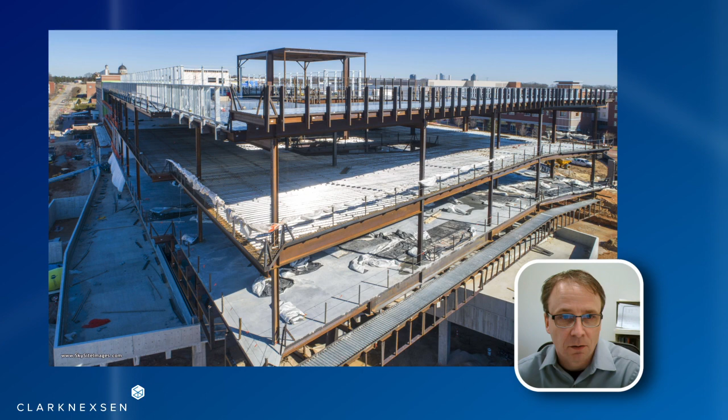You may recognize this building as Fitts-Woolard Hall at NC State. It's an architectural wonder, but it also has many visible features of engineering. And this is intentional. It's the main engineering building for the campus, so engineering students can see and experience firsthand the actual systems they're learning about.

Now, we've talked about how important structural engineering is, but what exactly is it? In summary, it is the design and arrangement of materials and members to resist loads, to make something stand up against gravity, or the wind, or an earthquake. We determine what the skeleton and framework of a building needs to be in order to stand up to these forces. We use a variety of materials and a system of components to make this happen. We'll talk about each of those in more detail today.

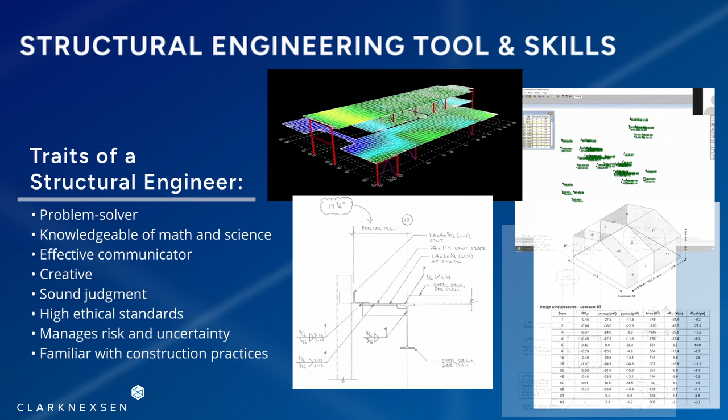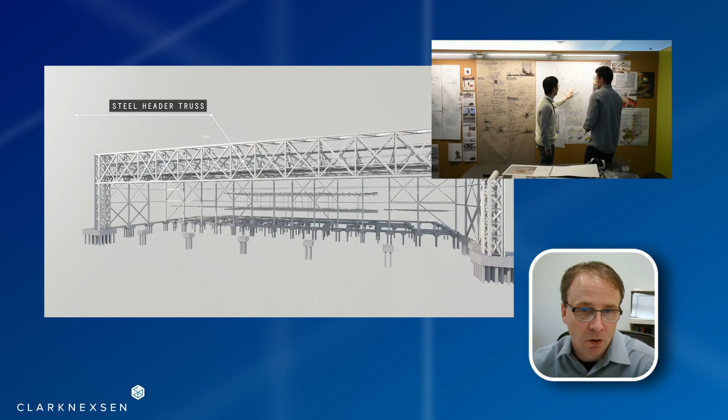As you'd expect with engineering, there's a lot of math, science, and technology involved. We do a lot of calculations, drawing diagrams, and running computer analysis. We have to determine the forces on every structural element in the project and design it to safely resist those forces. Structural engineers are just one part of the design team that makes a complex building come to life. We work closely with architects, mechanical and electrical engineers, civil engineers, plumbing and fire protection engineers, each with their own specialty and adding their own expertise to the finished product. So teamwork is a very important skill.

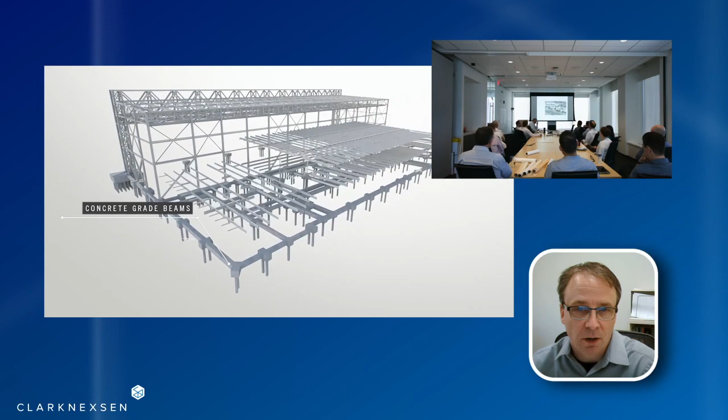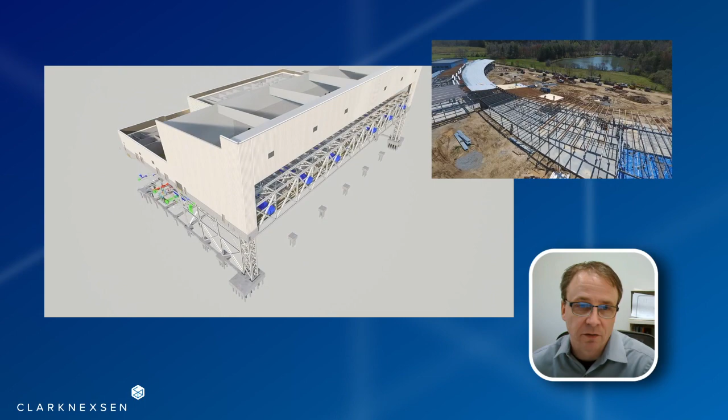We also have to be familiar with construction methods and materials to balance strength, cost, durability, and appearance to create a frame that can be constructed in the time available, with the money available, and still support the architectural vision. Structural engineering involves investigating and discovering the numerous requirements and constraints of your project, and then working with your team to get the best possible solution.

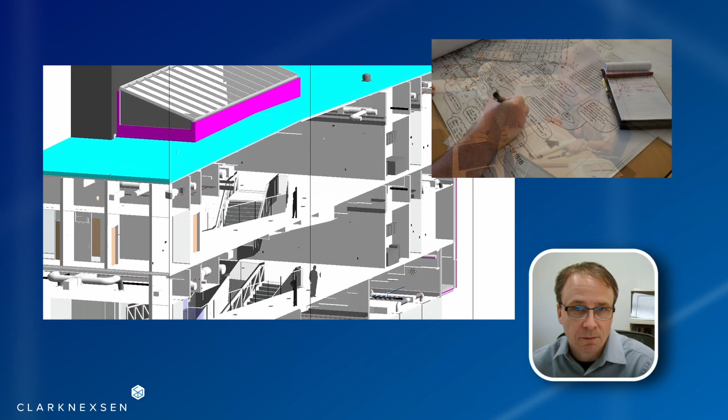Structural engineering also has a creative, artistic side to it. Each building project is new and unique, with new problems that need creative solutions. We spend time sketching and visualizing various issues, exploring options, and developing alternative solutions. And once a problem is solved, we need to translate that math and science into pictures and drawings that can be used by contractors to construct the building. It's never boring and always challenging.

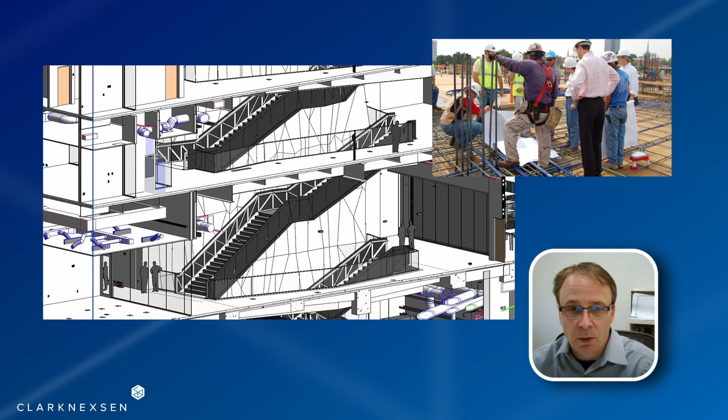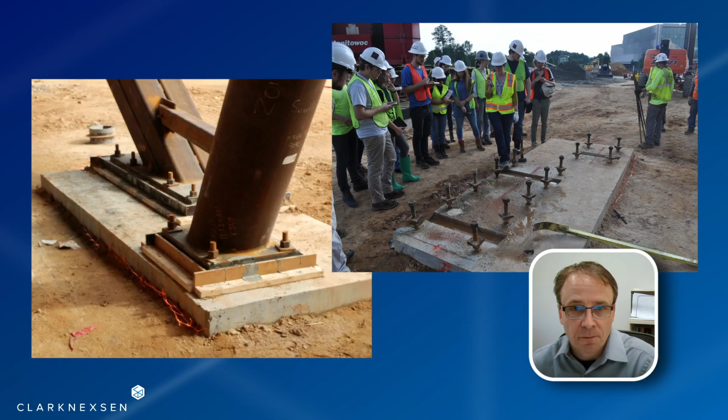One of the great things about this career is getting to see your design get built. Part of the work of a structural engineer is working with construction contractors to make sure that everything goes together correctly, that your design is properly executed. Seeing something you calculated and designed being built is really one of the most satisfying aspects of this profession.

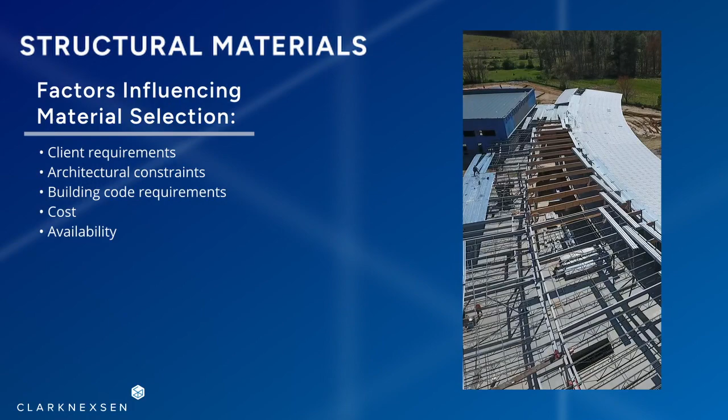Today I'm going to talk to you guys about structural materials. Structural engineers consider all kinds of materials when designing a building. Most of the time, the material choice depends on what our client wants, what the architect wants, and what is required by the applicable building code. Cost of the materials is a key factor. Our client doesn't have all the money in the world to build the structure they want, so we have to keep that in mind when choosing the material we want for our design.

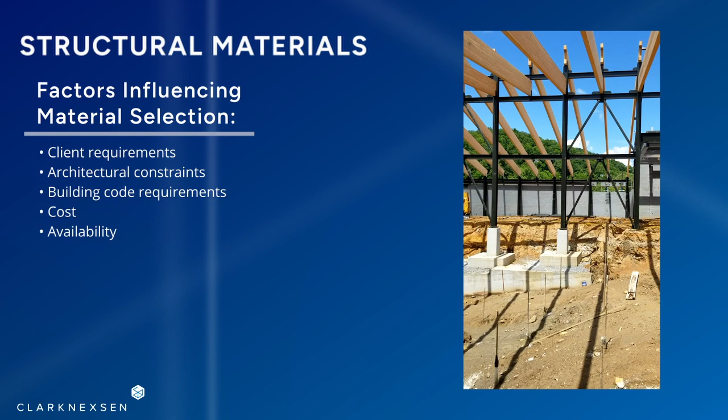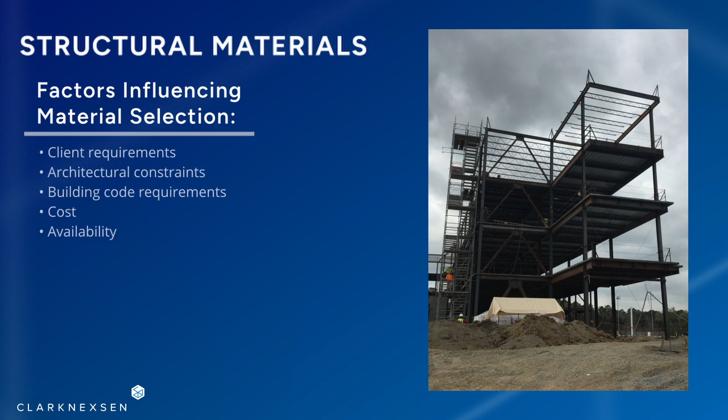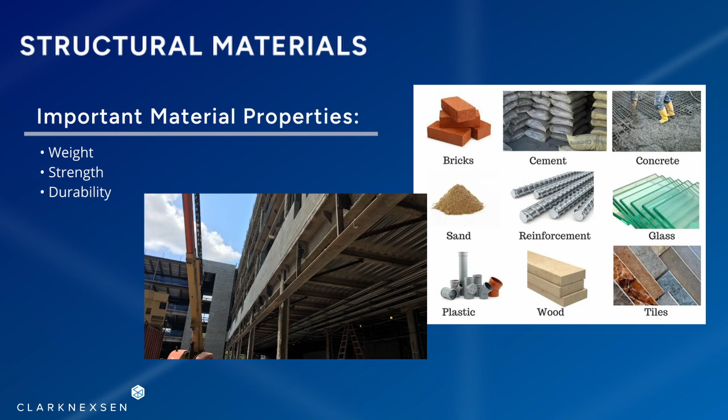Availability is important. Not all materials are available everywhere. For example, if you're in Alaska, you may not be able to get the same materials as you can in North Carolina. All materials are different and have different properties that need to be considered during design. One property is weight. We need to make sure that our building isn't too heavy because that will affect our foundation design. Another quality is strength. We want our materials to be efficient and strong enough to resist all the loads they're going to see. Durability is another quality that we design for. We want our structure to last long. We don't want it to be worn down by the environment or outside effects that impact the material.

First, we're going to talk about concrete. Concrete is a material that we use very often as structural engineers. If you just sit and think about your everyday life, you see people walking on a sidewalk, driving on roads, the driveways of your homes. Typically, it's always some type of concrete. Concrete is everywhere. It can be used for any shape or size and for any need you have.

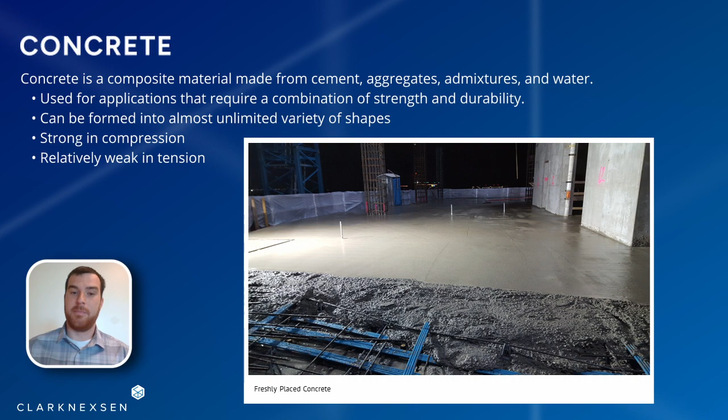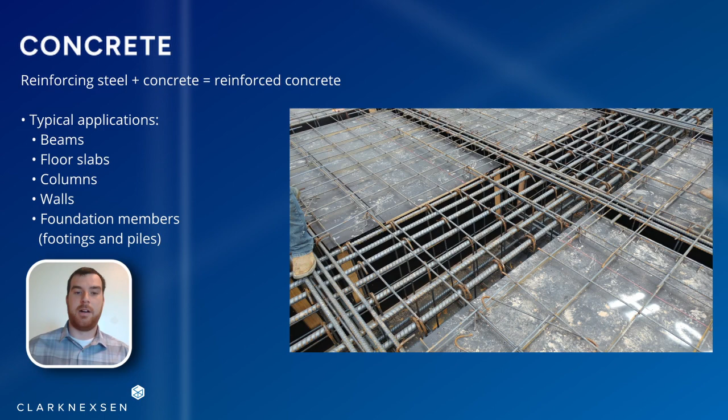Concrete itself is very strong in compression, but it's pretty weak in tension. Due to the weakness in tension of concrete, we add steel. Reinforcing steel is often called rebar, and this is what creates reinforced concrete. Reinforced concrete is also used everywhere. We use it in buildings, bridges, waterfront piers. Reinforced concrete is just a great material to use for design.

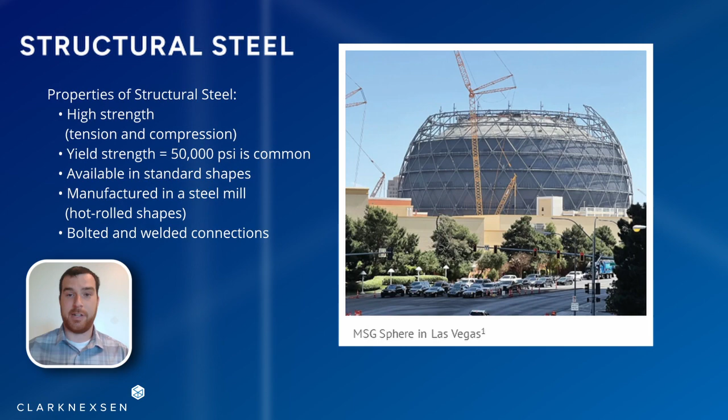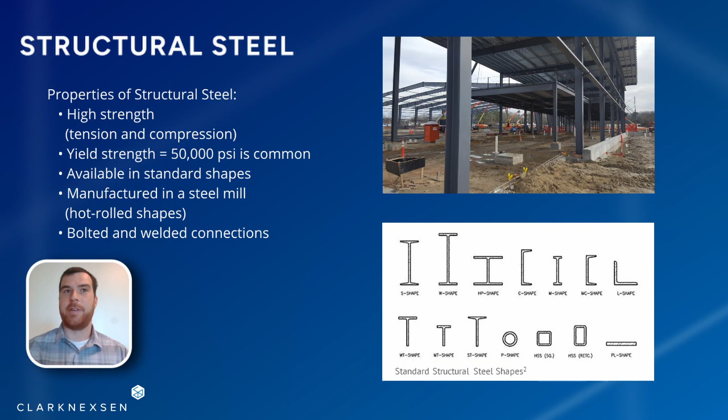Another material that we use is structural steel. Structural steel is very strong in tension, very strong in compression. It has all kinds of shapes that can be used for any need on the project. And that's why we like it so much. It's just very flexible for design purposes. We can use it to fit any need for any loading condition.

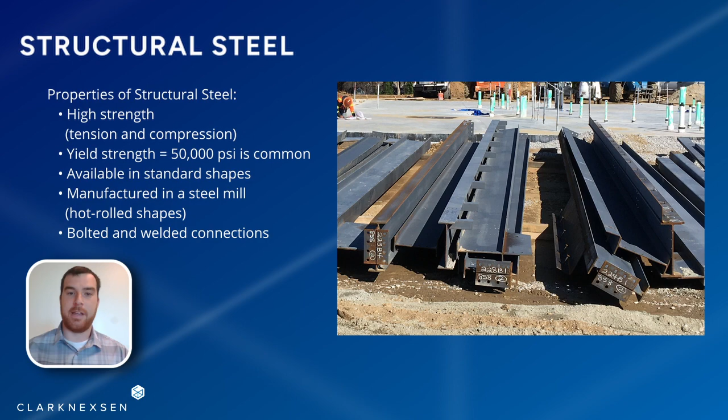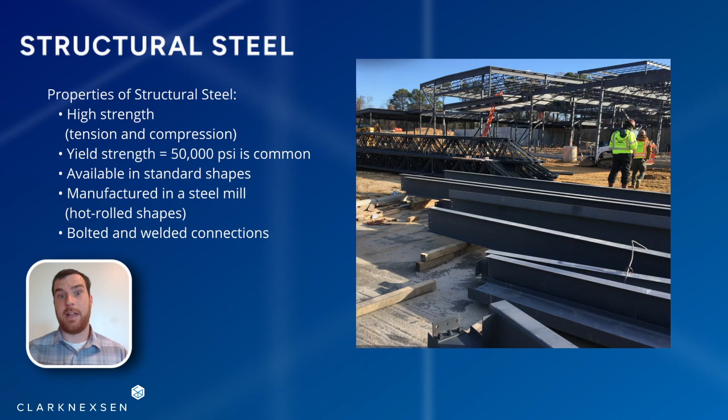Another positive of structural steel is that a lot of the connections that are made in the field can be done in the shop. You can do a lot of welding, pre-assemble everything essentially, and then when it's brought on site, it can be put together very quickly, which reduces labor costs, which reduces the cost of the project. And steel can be relatively lightweight if you compare it to concrete, and so it's pretty easy to transport and handle using cranes and whatnot.

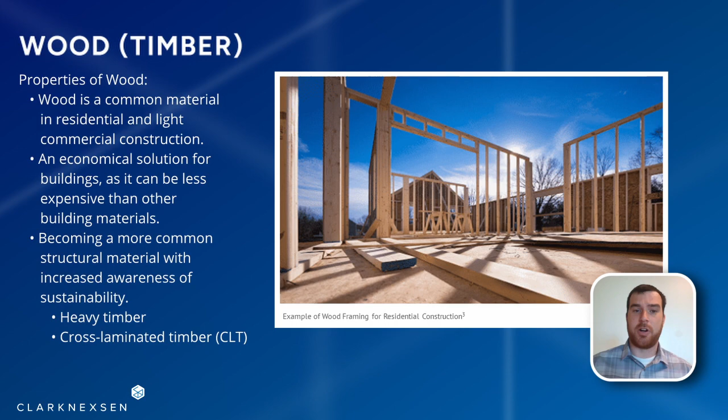Another common material that structural engineers use is wood. Wood design is typically a specialty field of structural engineering that's used in residential construction. And as a material, wood is strong in compression, but it's pretty weak in tension, if you compare it to steel. And wood is a good option for materials when you're trying to reduce the carbon footprint of a building.

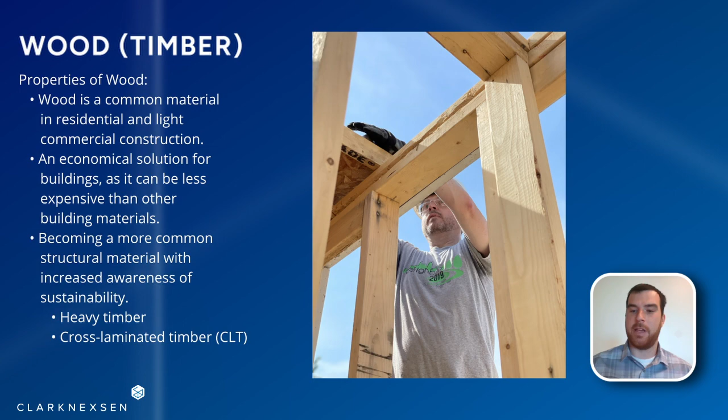We're in 2023, and there's a lot of goals as a structural engineering community to try to reduce the amount of carbon that goes into our design and building of structures. Concrete is very energy intensive to produce, and steel can be very energy intensive to produce, but wood typically is not very energy intensive, and it's very good for designing sustainable structures that can last a long time.

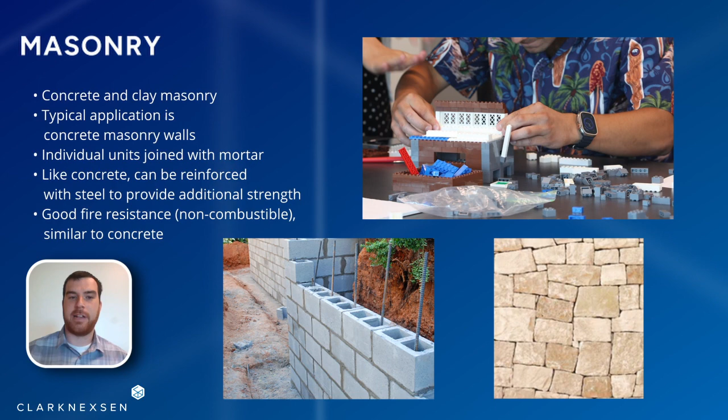Another material that we use is masonry, and masonry is a material that's almost like Lego blocks. The blocks are stacked and connected with mortar. A lot of schools are built with masonry. If you look at your walls, there's a chance that those are masonry.

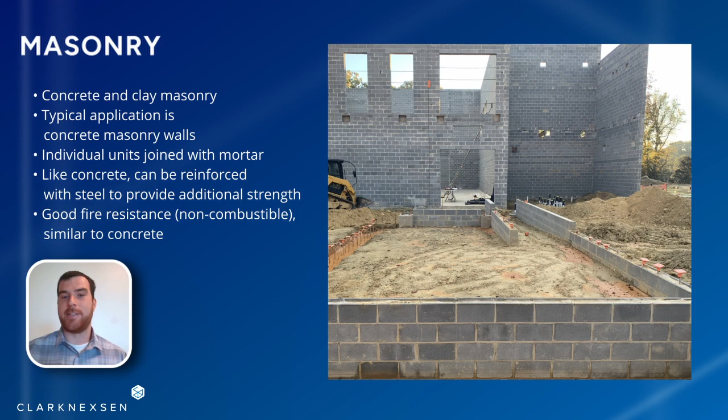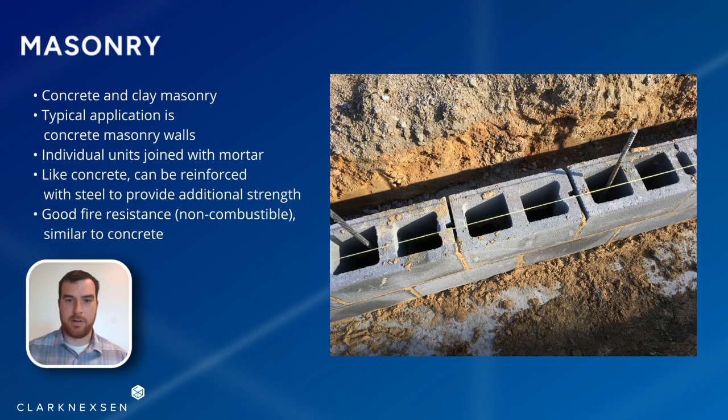Masonry can provide insulation for a building, which is great for reducing the cost of energy that is consumed throughout the life of the structure. Since it provides insulation, you're not going to get as cold or as hot as quickly. And we can add reinforcing steel to masonry to make it stronger to resist tensile loading. One of the downsides of masonry is that it's very heavy and labor intensive to build, and like concrete is also weak in tension. With all this information in mind, let's go over a brief summary.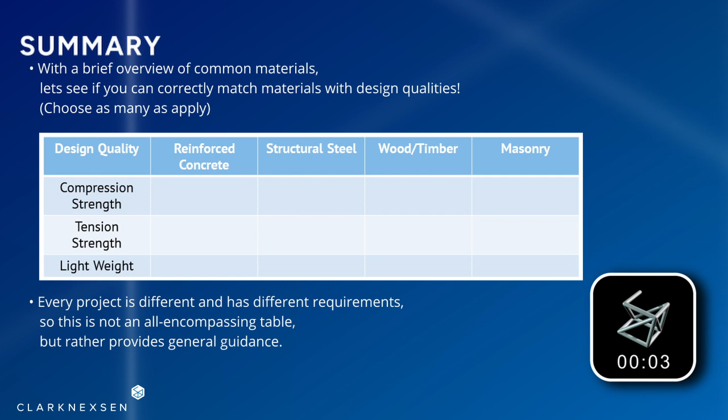We're going to answer all of the questions and then go through them individually at the end. After our discussion, let's select which materials are strong in compression. You chose all the answer choices. You are correct. Next, we're going to talk about which materials are strong in tension. If you chose structural steel, you are correct. Next, which materials are considered lightweight? If you chose structural steel and wood, you are correct.

We mentioned that concrete is great in compression, but not so great in tension. And this is why we add reinforcing steel to it. However, compared to steel, even reinforced concrete is not as strong in tension, and concrete is just very heavy compared to the other materials listed. As we talked about, structural steel is great in tension and compression and is a lighter weight choice than concrete and masonry, and still has all the design requirements that we need.

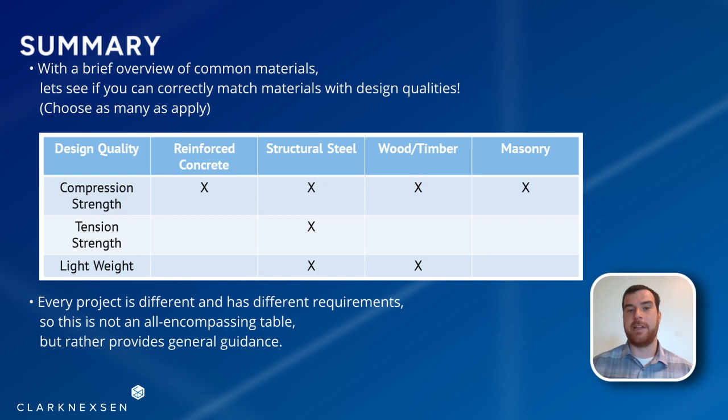Wood is strong in compression and okay in tension, but compared to structural steel, there's no contest. Wood is not as good in tension as structural steel. And wood is also a lightweight material. Then there's masonry. And masonry is great in compression, just like concrete. And also like concrete, it needs steel to be added to provide tensile strength, so it can be considered weak in tension. And masonry is also very heavy.

All right, now that we're done talking about materials, let's talk about loads on structures. Loads are forces that structures experience during their lifespan that must be accounted for and designed. Structures must be strong enough and stiff enough to resist all of these design loads. As structural engineers, we determine loads based on the applicable building codes and design standards.

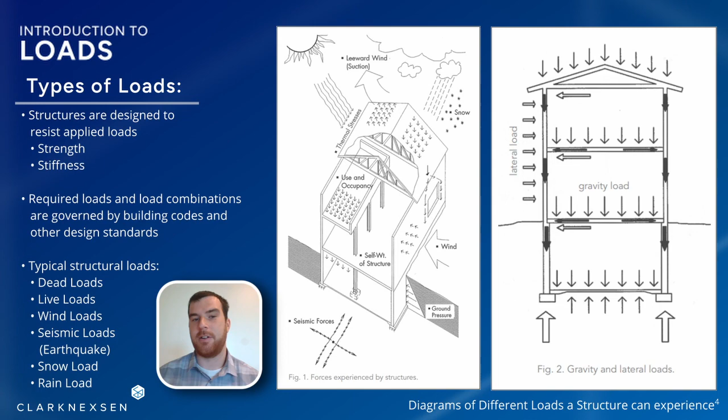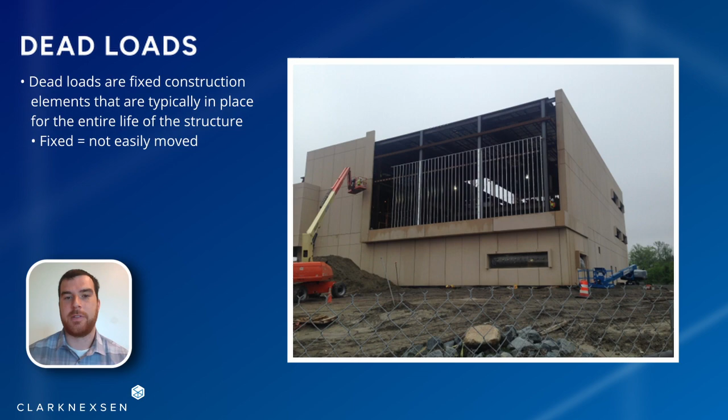Now we're going to talk about other types of dead loading. Self-weight of the building, which I talked about, like walls and floors, but also the windows, the ceiling are all parts of the building that are considered dead load. Conduits and pipes for water, electrical, those are all considered dead loading. Air conditioning units on top of the structure, that's dead loading. And then floor coverings like carpet, hardwood are all considered dead loads.

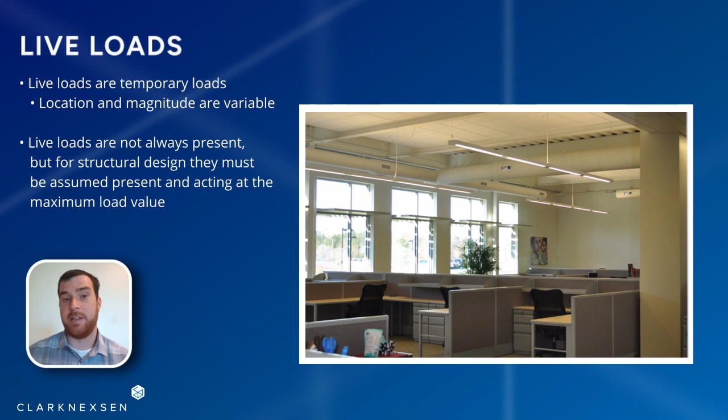Next, we're going to talk about live loads. Live loads are loads that can be moved in a structure. Live loading is different than dead loading because live load may or may not be present, but it must be assumed that the live load will be there for us to design it. Now let's talk about types of live loads. For example, you sitting watching this video are considered a live load for design purposes. The chair and the desk you are sitting at are also considered live loads.

100 pounds per square foot is a very heavy live load. This is compared to normal design standards. For example, the ASCE 7 design code states live loads for different buildings and rooms and whatnot. And live loading for a classroom is considered 40 pounds per square foot. So 100 pounds per square foot is almost 2.5 times the amount of the normal live loading in a classroom.

Another common type of loading we consider is wind loading. Wind applies pressure to structures and causes them to move side to side. Wind on a structure is similar to how wind pushes a sailboat. The only difference is we want wind to push us when we're on a sailboat. We do not want wind to push a structure, so that's when design comes in.

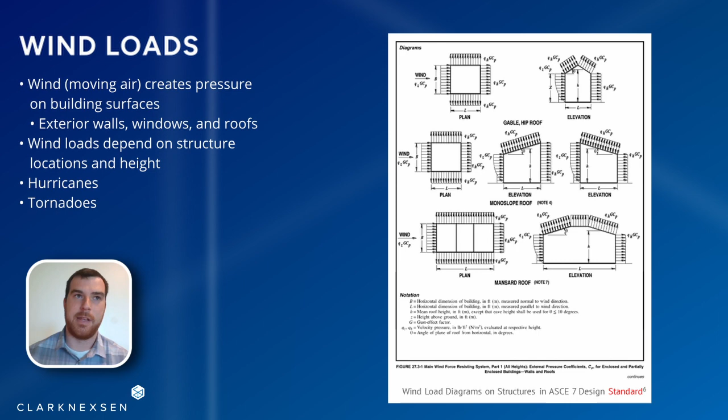Design wind loading is typically done to account for wind loads that can be caused by hurricanes and tornadoes, as these high-level winds are not very common but can be crucial for the safety and stability of the structure. As you can see on this PowerPoint, there's an image from the ASCE 7 design code that shows how wind acts on different sections of a building.

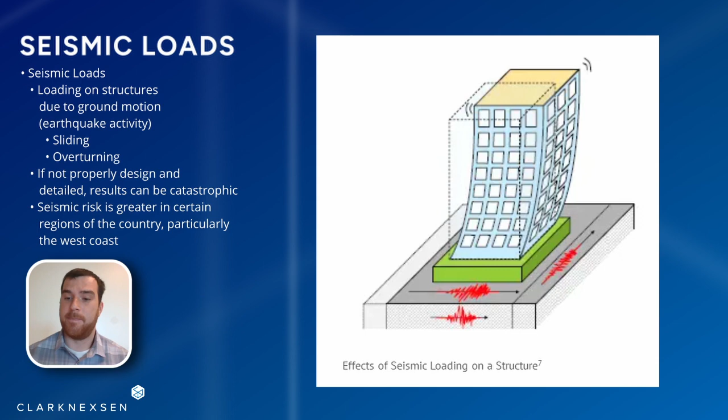Now we'll talk about seismic loads. As I mentioned before, seismic loads are caused by earthquakes, and cause a building to move side to side, overturning. Seismic loading is critical for the design of structures on the West Coast of the United States. And here on the East Coast, we still need to consider them, but they typically do not control our design.

Snow loading is when snow piles up on a structure during a snowstorm. This is a critical load because typically if it's snowing, the temperature is below freezing and the snow does not want to melt right away. And if the snow doesn't melt right away, it can pile up very quickly. Obviously, snow is made of water and water is very heavy. So as this snow builds up, this can create a very large load on the structure, which needs to be accounted for in design.

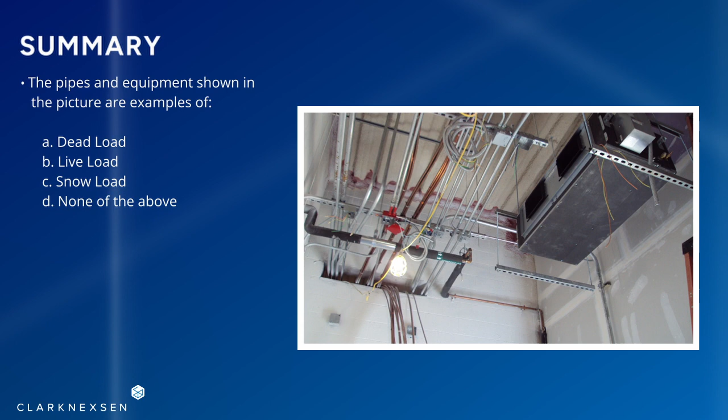Rain loading is like snow loading, but rain typically does not accumulate as quickly due to evaporation and the fact that water moves a lot quicker than snow does. With some simple knowledge of loading in mind, we're going to see what you know with this poll question. Shown in this photo is some equipment hanging from the walls and ceiling of a building. What type of loading would you consider this photo to be showing?

If you said dead load, you are correct. Pipes and conduit have a fixed weight and do not change throughout the life of a structure, which is why this is considered dead loading. This isn't live load because none of these conduits are removable, so you would not want to consider them as live load. Snow load is also incorrect because we are inside of a building and there's no snow present in the photo.

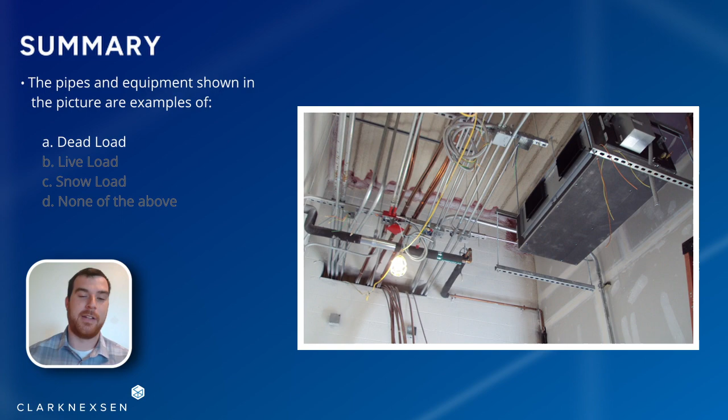Now that you've heard about the different materials we build with and the types of loads we design for, let's talk a bit about some different types of structural members. My name is Aleta Duff, and I'm a licensed structural engineer with Clark Nexsen.

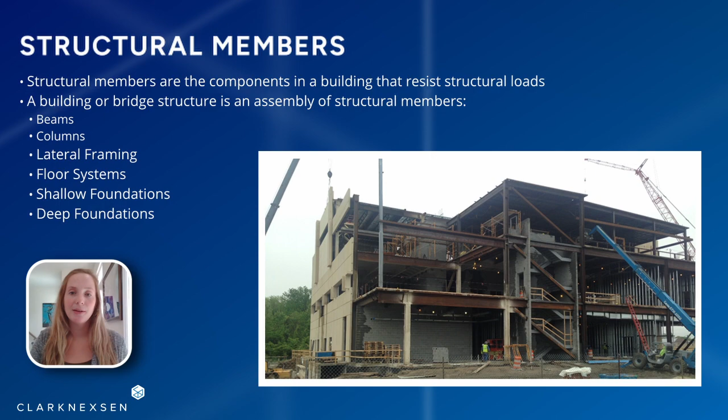Structural members are like the puzzle pieces that fit together just right to help a structure resist the anticipated loading conditions. Different types of structural members include beams, columns, lateral framing, floor systems, and shallow and deep foundations.

The first type of member we'll discuss are beams. A beam is a horizontal member that supports vertical loads, which we typically refer to as gravity loads. When these loads are applied, a beam will deflect downward in a bending motion. There are other loads that we design beams to support. Axial loads run horizontally and are typically applied at each end of a member. Axial loads either try to compress or stretch a member.

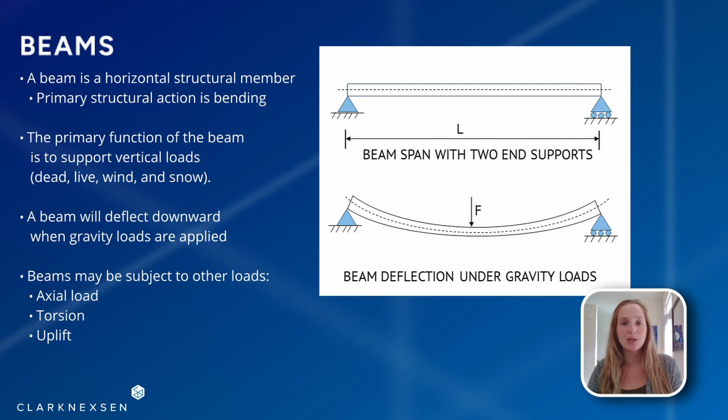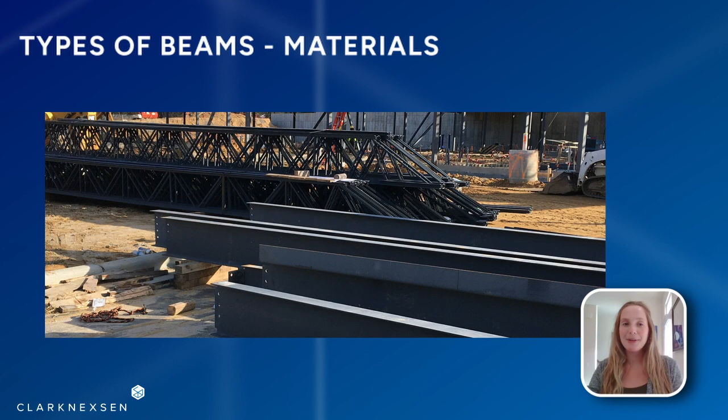Torsion is when a member is twisted along its length. Uplift is a different type of vertical loading where the beam is loaded from beneath and deflects upward in a bending motion. Beams can be made of several types of materials. Typically, if a beam is to be designed with steel, we'll use one of two shapes.

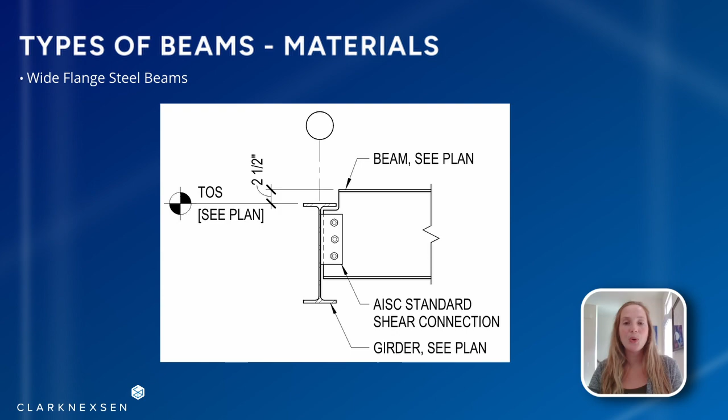Wide flange beams are shaped like the capital letter I with two horizontal flange plates and a vertical web plate. This shape is more lightweight and therefore cheaper than a solid rectangle of steel. Wide flange beams are typically used to support building floors and bridge decks.

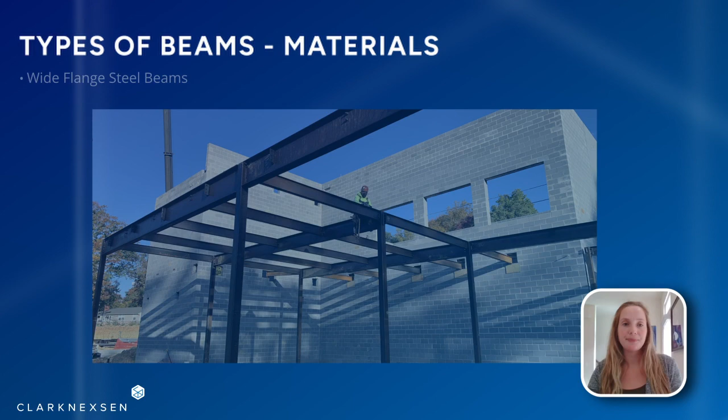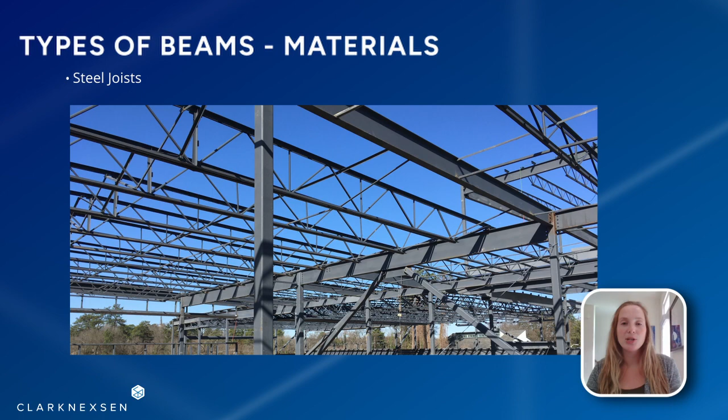Another steel beam we use are steel joists. These look like trusses and are typically used to support roofs. Although these typically aren't as strong as most wide flange beams, because they're so lightweight, they can span much farther distances. Beams can also be constructed of concrete or wood.

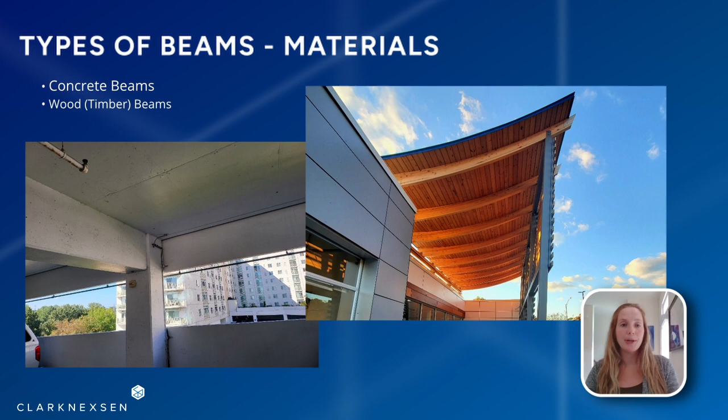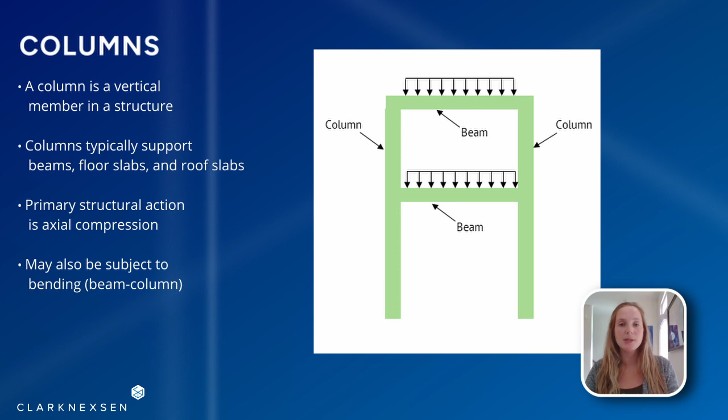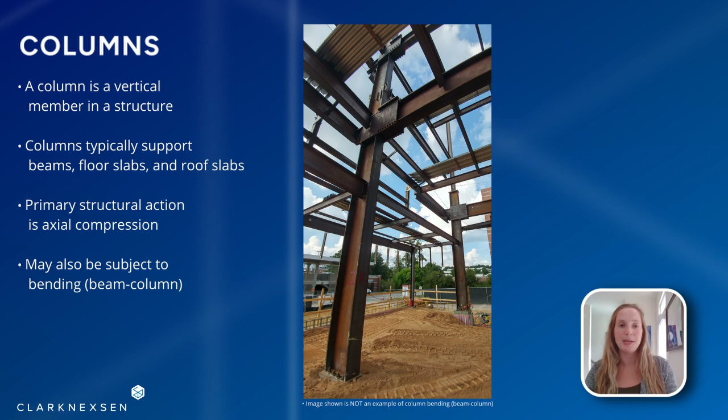Another type of structural member are columns. Columns are vertical members that support vertical loads coming in from beams, floors, or roofs. They mainly support axial loads applied at either end of the member. Depending on how a structure is constructed, sometimes columns also experience bending from horizontal loads similar to beams. When a column is used to support both axial and bending forces, we call it a beam column.

Columns loaded axially or in compression will deflect in one of two ways. If a column is relatively short for its size, it will crush or shrink. If the column is long, before it can be loaded enough to crush, it will buckle or deflect in a shape similar to how a beam would deflect.

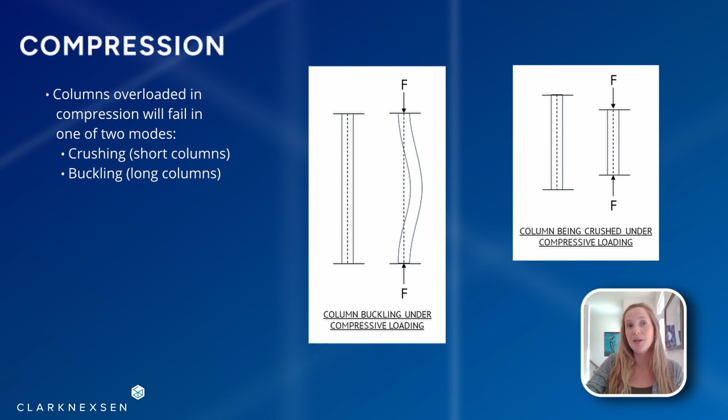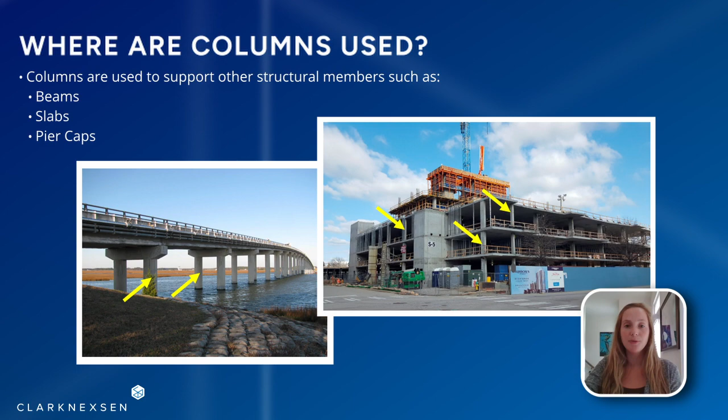In the picture on the right, the floor loads from the building are supported by concrete slabs. These concrete slabs are then supported by concrete columns, which run down from floor to floor down to ground level.

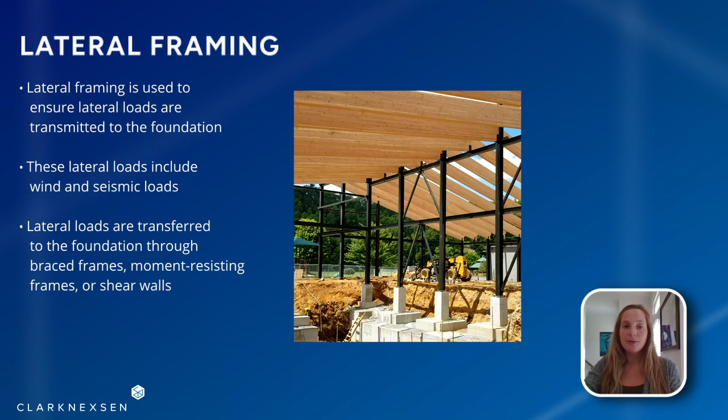The previous two types of members we discussed are mainly used to resist vertical or gravity loads, but what about horizontal or lateral loads from wind or earthquakes? In the picture shown here, as the building tries to deflect or sway from side to side under lateral loading, the steel diagonal braces running between the floors are either compressed or stretched. The horizontal loads are then transferred to the columns, which eventually transfer the load down to ground level.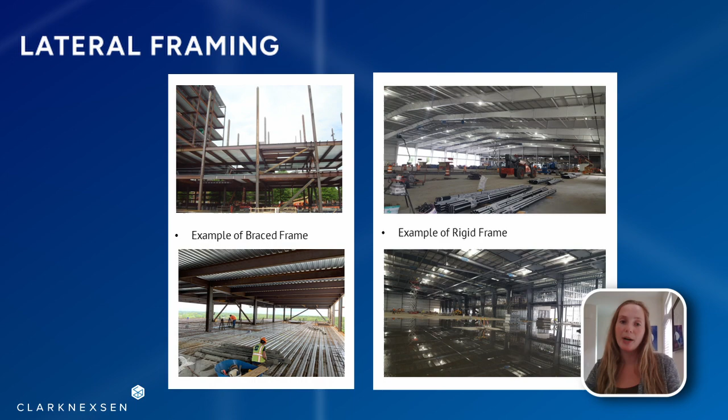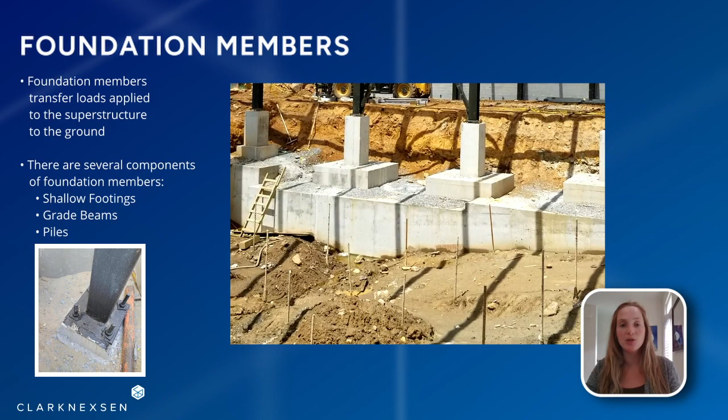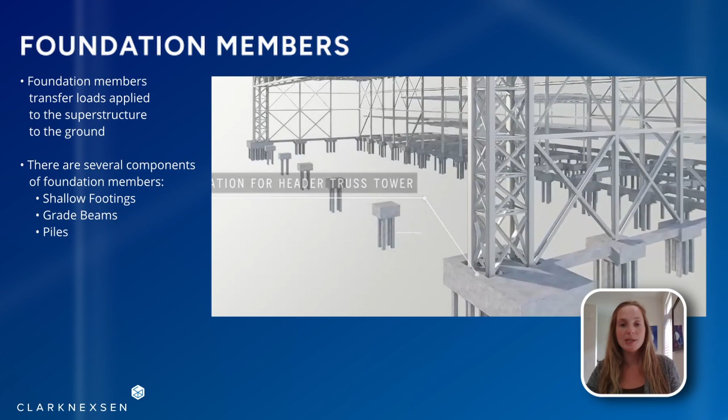So I keep mentioning how columns transfer the loading on a structure down to ground level, but what happens when the load reaches the ground? Structural engineers, with the help of geotechnical engineers, design foundation elements to transfer the loads from the building down into the soil. There are several types of foundation elements, such as shallow foundations and piles.

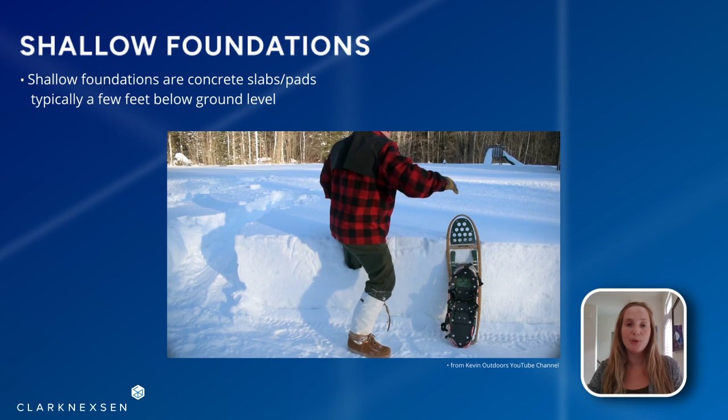Shallow foundations are typically constructed a few feet below ground level and are designed to spread out a force over a larger area. For downward forces supported by shallow foundations, think of how a snowshoe works. If you were to step into snow with just your boot, you would sink through. However, when you're wearing a snowshoe, the load is spread out over a greater area so that you can walk on top of the snow and be properly supported.

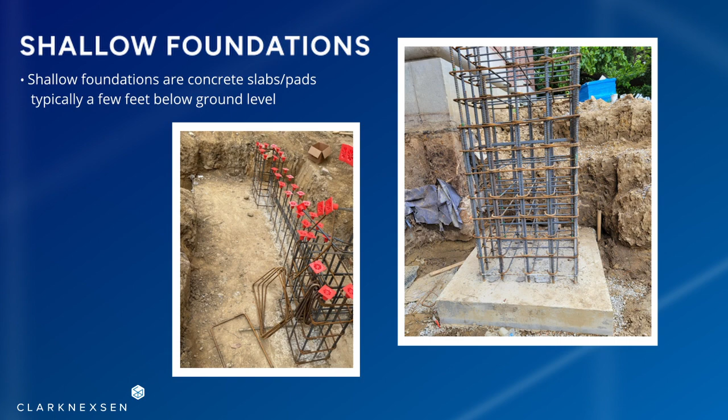Similarly, a shallow foundation will spread out the load coming down from a column or wall into a wide enough area so that the structural member won't sink in or settle into the ground. Sometimes when the soil is very weak or unstable, it's not feasible or possible to use the required size shallow footing the structure would need to be properly supported. In these situations, piles are used.

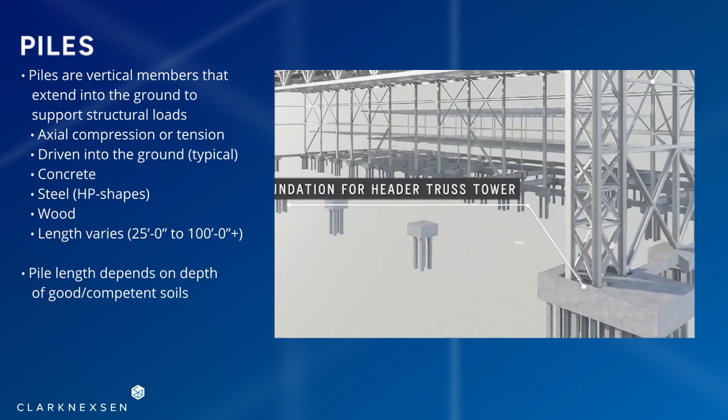Piles are like long columns that are embedded into the earth, and they can sometimes span lengths greater than 100 feet. These lengths depend on the findings of geotechnical engineers. They're embedded however deep is needed for them to reach stable, strong soil. Piles can be constructed of steel, concrete, or wood.

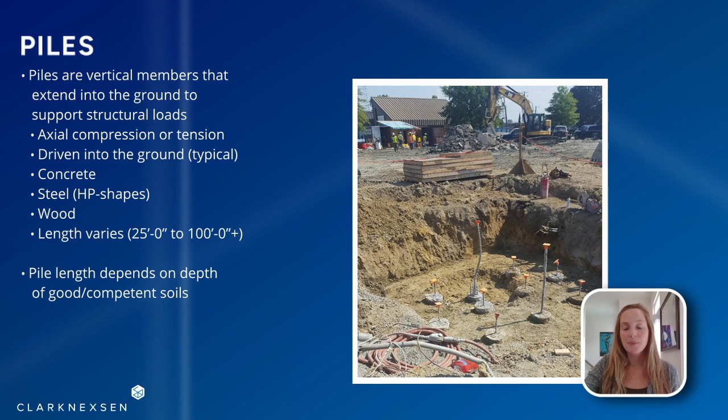Typically, piles are driven into the ground with a large hammer, but sometimes that isn't possible. In the picture shown here, these are auger cast piles. That means these piles were embedded by digging out the soil with a large auger. Then the hole was filled with reinforcing steel, and lastly, concrete was poured in to fill the hole.

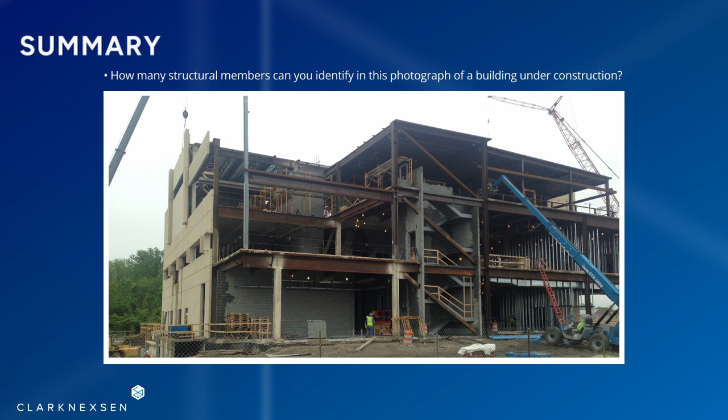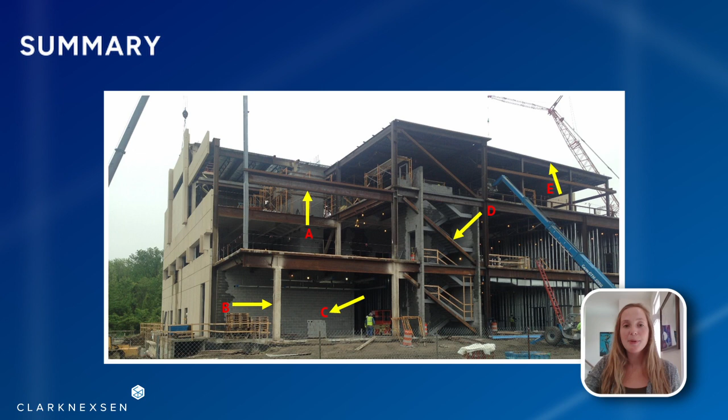So now a poll question. This picture shows several of the members we've talked about, as well as an additional 2 or 3 that we mentioned but did not specifically go over. How many can you identify? As the arrows point out, this picture contains beams, columns, walls, lateral framing in the form of steel braces, and roof decking or slabs. Although not visible, there are also foundation elements below the ground supporting the structure.

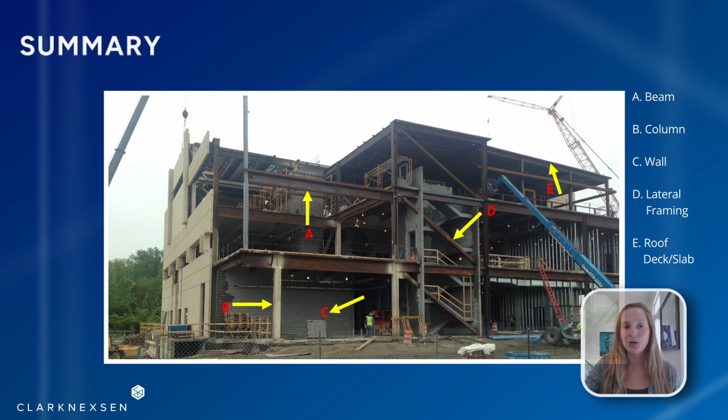A recent project of interest is the Virginia Beach Sports Center. Located near the oceanfront and resort area of Virginia Beach, it serves as an indoor athletic event center for the region. It features basketball and volleyball court space and a full indoor track, complete with adjustable banking and an infield for other track and field events. It's really amazing to see all this under one roof. The engineering for this project was challenging for several reasons.

First, the building is located only about a mile from the Atlantic Ocean. As you know, the whole Atlantic coast is susceptible to hurricanes with high winds and flooding. So this building is right in the crosshairs of any major storm that comes up the coast. There was discussion during design about whether the city would use the building as an emergency shelter during these storms, which would have required us incorporating some extra safety factors and extra considerations into our design. While the city ultimately decided not to use it as a shelter, it is still designed robustly enough to weather the expected storms.

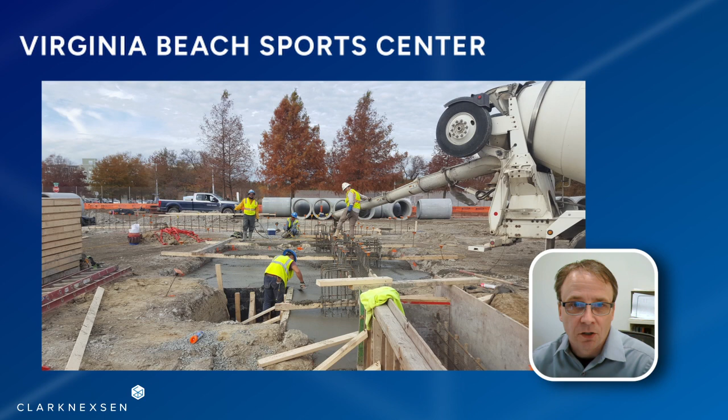As I mentioned before, doing local projects is great as we get to see them being built. At the Sports Center, we were able to see the foundation construction using reinforced concrete and shallow foundations. In these pictures, you see the workers placing concrete from delivery trucks. The reinforcing steel has been tied in place, and wood forms were constructed to form the concrete to the correct size and shape for the various foundation elements.

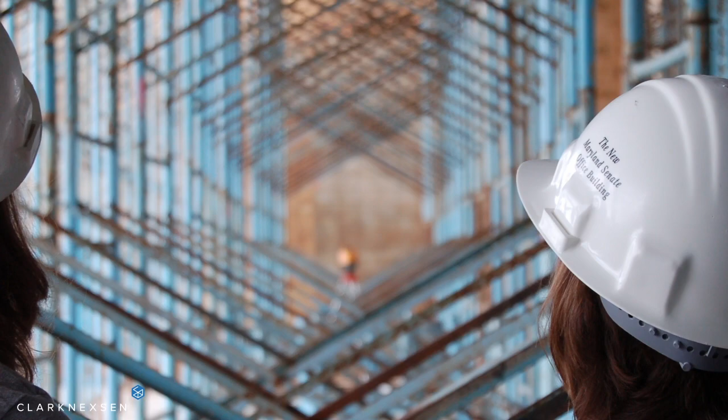So, in conclusion, we hope that everyone learned a little about structural engineers and our work, and that you'll now have a solid foundation for your design project. If you have any questions, please lean on your structural engineering mentors or reach out to any of us. We're looking forward to seeing what you come up with and wish you well with your future studies.